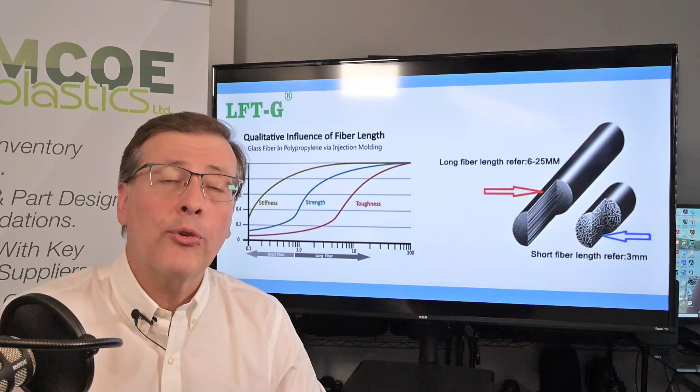So first of all, we're going to put this in the context of long glass versus what we're probably more used to seeing, a short glass pellet. So I'm just going to turn and we'll get into that. So a short fiber length pellet, this particular graphic is showing a 3 millimeter. We may also think of that as about 1/8 of an inch, give or take. And this is what we typically see on the shop floor when we're thinking about a glass-filled polypropylene or a glass-filled nylon.

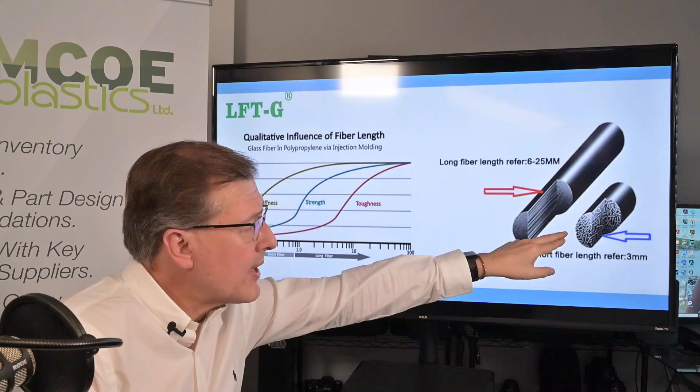Now these materials are super common. They boost the characteristics of the carrier resin, typically in strength and durability, as this graph, which we'll get to in a moment, would bear out. Now, if you'll notice, in a short glass, the 3 millimeter strand, these strands come pre-cut. They're put into the compounding line. They're mixed and strand cut into the pellets that we're seeing here. But you'll notice that there's quite a random orientation, so that can cause problems with warping during cooling, and it's a very common issue with glass-filled material to have some degree of warp.

Now, if we consider the long glass, well, let's see, 6 to 25 millimeter. I was actually just quoting a client this morning on a 12 millimeter long glass polypropylene material, so I've got some familiarity with it. But the length of the glass fiber is the length of the pellet. You'll notice the orientation is straight. There's nothing sort of jumbled up.

And we can change the content of the glass filler, the long glass filler, in the pellet. So we can go from 10 to about 50%. I think some manufacturers may go as high as 60, but 50 seems to be a sweet spot on the maximum end. But I just want to draw your attention to the fact that these are straight pieces of glass. That has to do with some of the capital equipment requirements of how this is compounded, pulling glass through a line and wetting out the glass. The pellets, the strands are cut to length, and you have your product ready for sale.

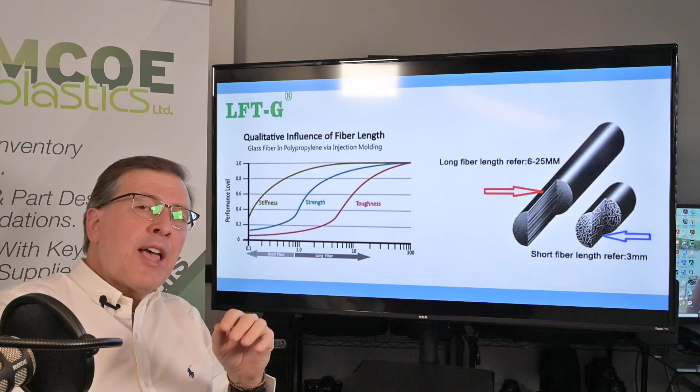Now, where might you consider using a long glass material? Well, it's kind of interesting. Despite it being a more expensive product than a short glass pellet, it may actually be a cost down depending on where you're coming from. If you're using a more expensive kind of esoteric type of engineered resin, a long glass nylon or a long glass polypropylene may give you a cost down.

Plus, you've got the familiarity of running a more conventional commodity-based resin, the carrier resin, instead of something like a PPS, which may require an oil heater on the mold, so you get into elements of complexity, and there's maybe some concerns about safety as well. These are very conventional in terms of how they run. You do have to have some tooling considerations. Sprue and runner and gate land, that kind of thing has to accommodate a long glass pellet, and you have to work with your tooling partner to identify the special needs that that particular tool and part will have to accommodate this type of material.

So where are you going to use it? As a cost down from a higher end resin. Secondly, you may wish to consider a long glass material if you are looking at a metal replacement. I've seen many times in my career metal parts replaced, and I'm thinking of things like cross-car barriers, cross-car beams behind the instrument panel, where you might have mounting pickup points for a steering column or HVAC components, that type of thing. As we know with injection molding, you can get very complex part geometry pretty simply, as long as you avoid issues like die lock.

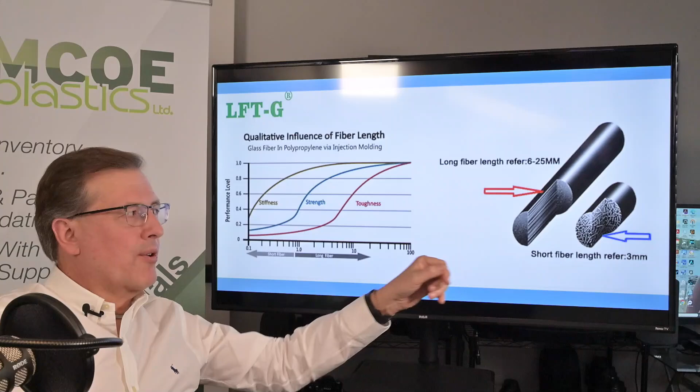Well, the same principle applies, but rather than a matting, which we can't injection mold, we have long strands of fiberglass, and it sort of takes us in that general direction of stiffness, strength, and toughness. And it is remarkably stronger than a short glass material. So consider it. It's an option in your tool belt if you're taking on a very challenging application, or you're trying to look at how to get away from a very expensive, unusual resin. Perhaps this is the solution for you.